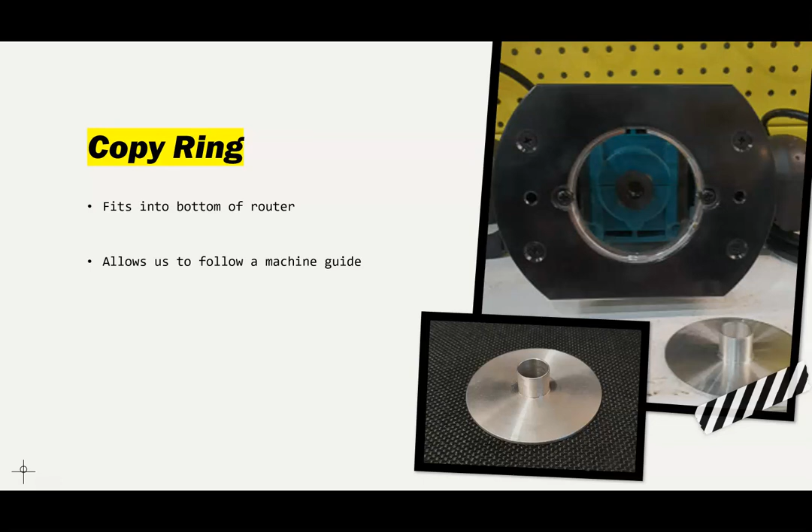So we can obviously purchase a range of different templates. You can get hinge templates, you can get letter templates, but with our laser cutter we can cut our own, and we can cut them very cheaply and efficiently out of cardboard, which can be recycled, so we're not wasting too much, and we can make them for quite large surfaces. In fact, you can actually create really large ones by adding smaller ones together if needs be.

We're going to create one that fills almost the entire size of our laser cutter, which is for us 800 by 500 millimeters. Before we do this, we need to do some maths about our copy ring and the cutter that we're using in order to achieve this milling capability.

We're going to have two assumptions, and this may change for you depending on which router and which cutter you're using, but most of us will be using a 16mm diameter copy ring, and a 1/2 inch cutter, which comes out at 12.5 millimeters. So those are the two assumptions we're going to use.

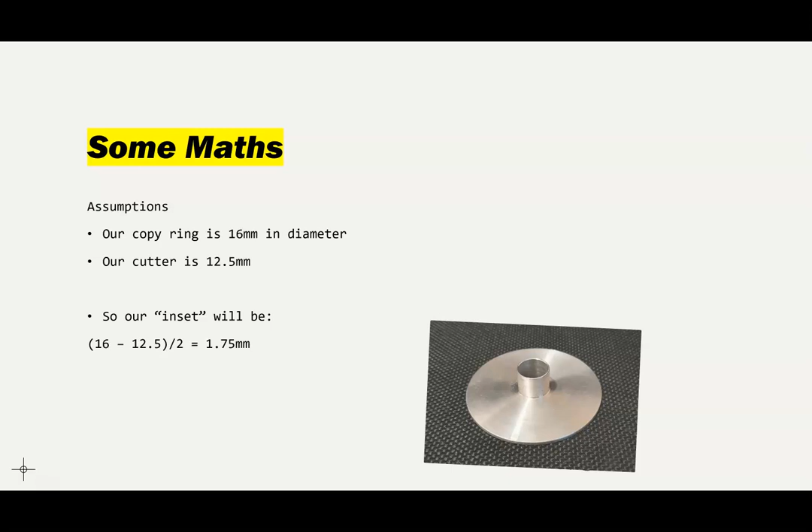Now, in order to do this, we need to do some maths. We have an inner offset and an outer offset, which we'll call our inset and our outset. The inner offset will be our inset, and that is going to be 16 minus 12.5 divided by 2, which is going to be an inset of 1.75 millimeters from the edge of our table.

And the other side of the slot that we're going to be cutting is going to be our outset, and that will be 16 minus that 1.75 millimeters. So that's 14.25 millimeters. So we're going to have to remember our inset and our outset, and you'll understand what this means fully as you follow the video through.

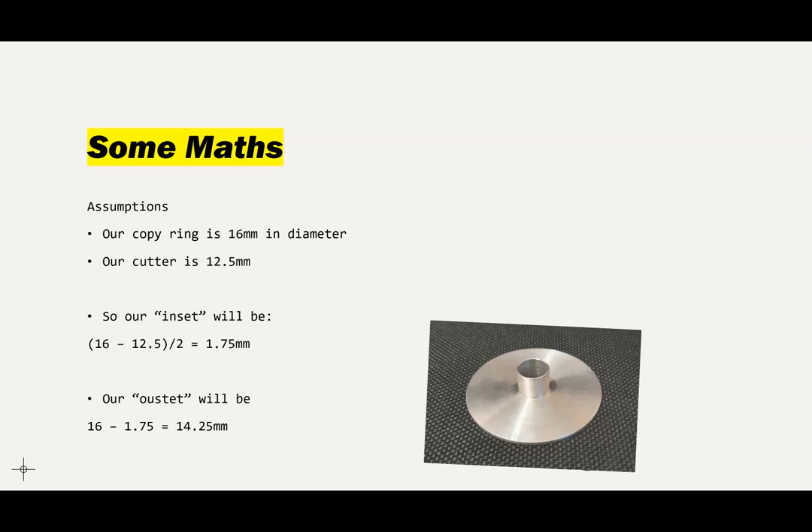So if you're not quite sure what I've done there, I've looked at the size of the cutter and the size of the copy ring, and I've done some maths in order to get that as close to my intended edge of my table as possible. So let's open up Fusion 360, and see how we go with creating this.

So here we are in Fusion 360, and I've created a little activity table. There's a Lego tray there. I'm going to put a plastic sort of container for the Lego to go in. And I've already created a machine guide so that I've tested this principle.

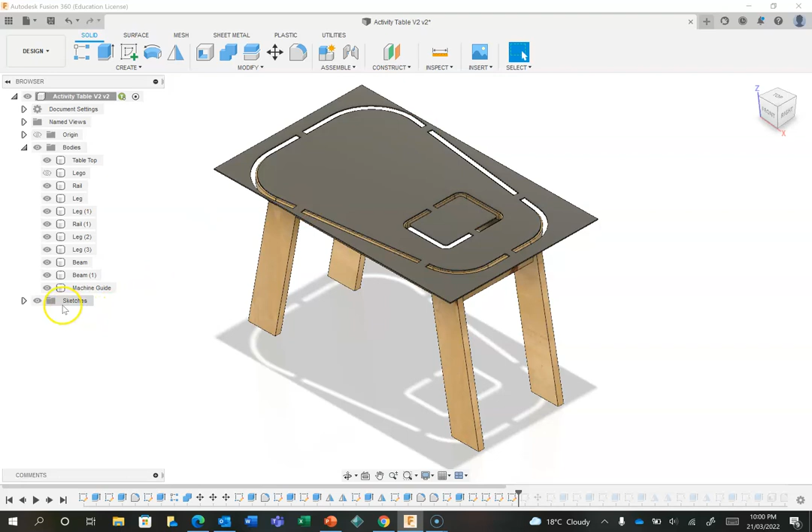There it is there. If I turn the Lego off, you'll see that it sits over there on a piece of cardboard. And this is what we create in order to create our copy guide, and you can see that the copy ring will sit in those grooves and cut around. I'm going to make some improvements on this one. For example, the tabs were a bit too big, so we're going to turn this machine guide off.

Before we do this, however, we're going to modify and change some parameters. We're going to create two user parameters. The first one is what we'll call our inset, the unit is millimeters, and it is going to be 1.75. And we're going to press OK on that.

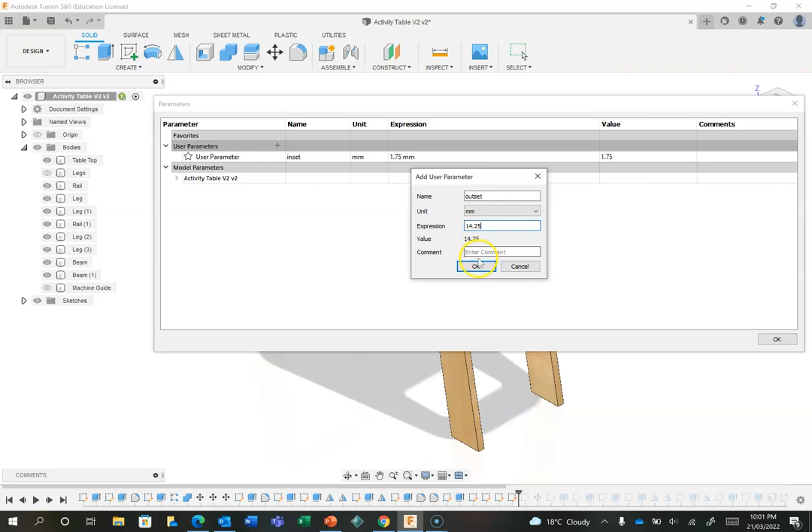I'm going to create another one, our outset, and our outset in millimeters was going to be 14.25. Now I've created these as variables because we can change these later, just in case we change the size of our copy ring or the cutter changes size, we can update those very easily without having to completely redraw this. So I'm going to press OK.

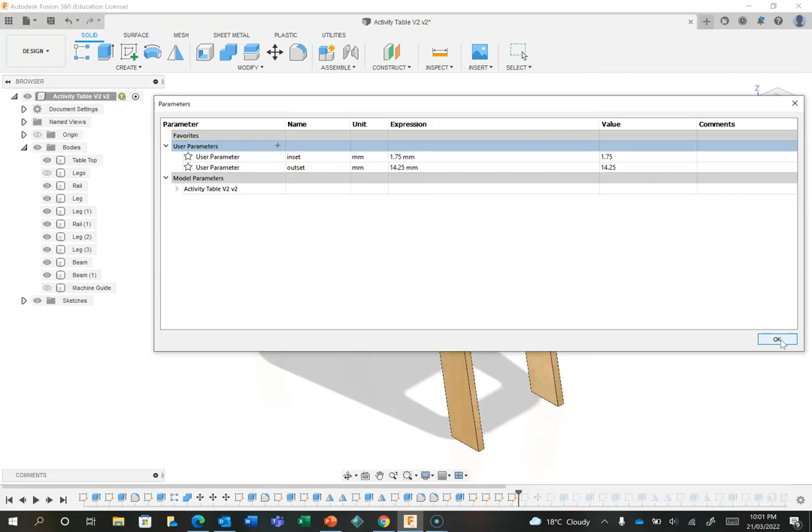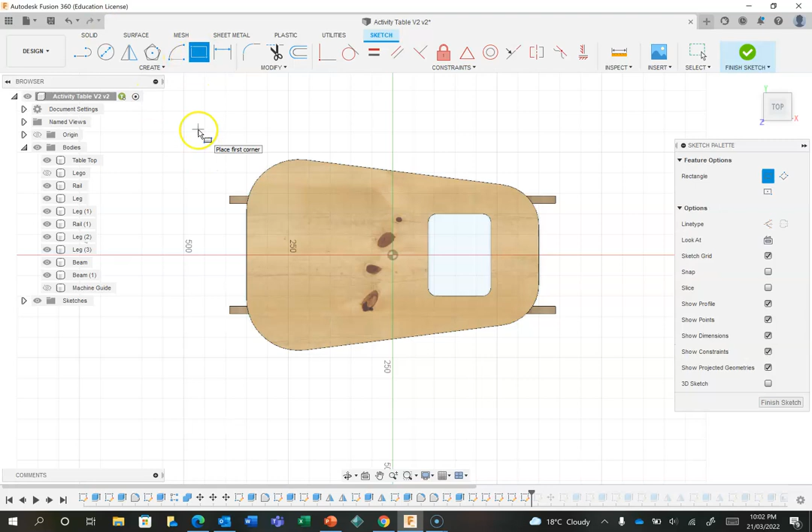Now that we've got those two, I'm going to create a sketch on the top of our table and move it around so that it's nice and in the middle. The first thing I'm going to draw is the outline of our object, which is the biggest size of our cardboard, the biggest size that our laser cutter can cut. So I'm going to draw this and put the dimensions on it. The dimensions are going to be 800 and 500.

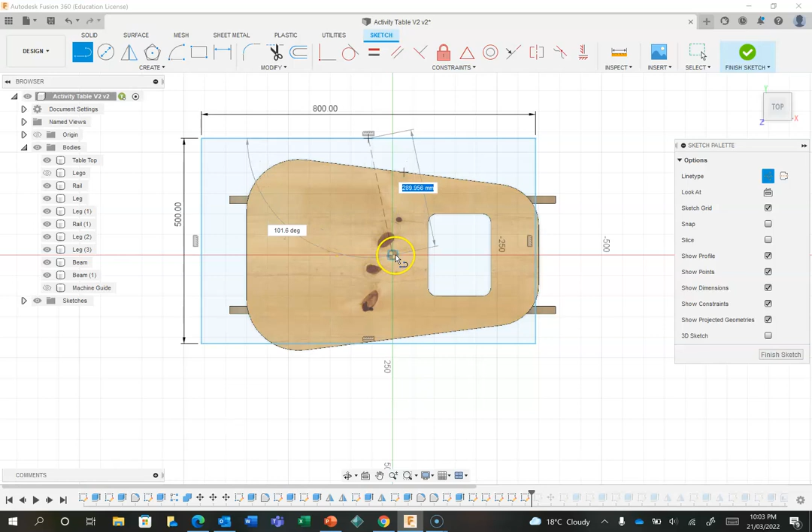And just to make it nice and easy for myself, what I'll do is I'll draw a line, and I'm going to draw a construction line. So I'm going to press on this icon over here. I'm going to go from the midpoint here. So as soon as I get that little triangle, that's where I'm going to go. So I'm going to click to accept that. I'm unclicking now, and I'm going to draw it down to this midpoint here. Actually, no, I'm going to draw it down to that midpoint down there, sorry.

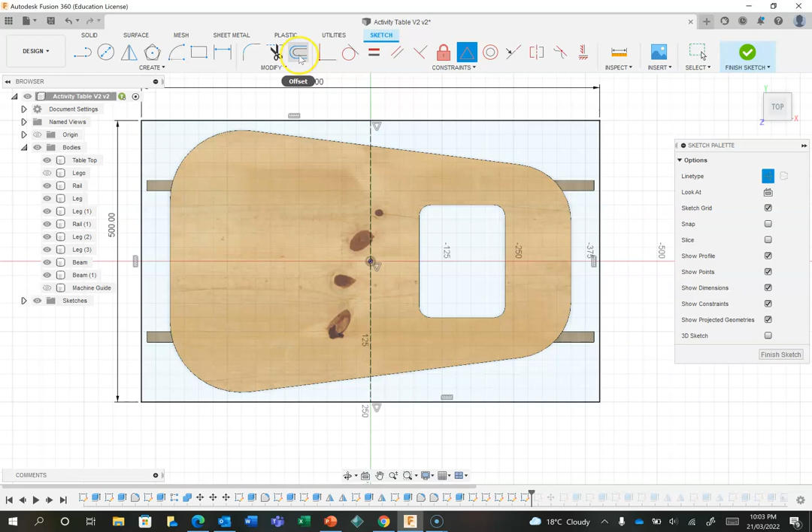So to click that, and then I'm going to use the midpoint tool, click on the midpoint tool, click on that line, and then click on the origin, and that's going to lock it nicely in place. So that's the first part of my sketch done. I'm now going to draw the inset using the offset tool. So the inset is going to be this one here, and the inset is going to be set to the inset. So I'm going to type in I, and that's my user parameter of inset, and I'm going to press on OK. So that is there, and I did that as a construction line.

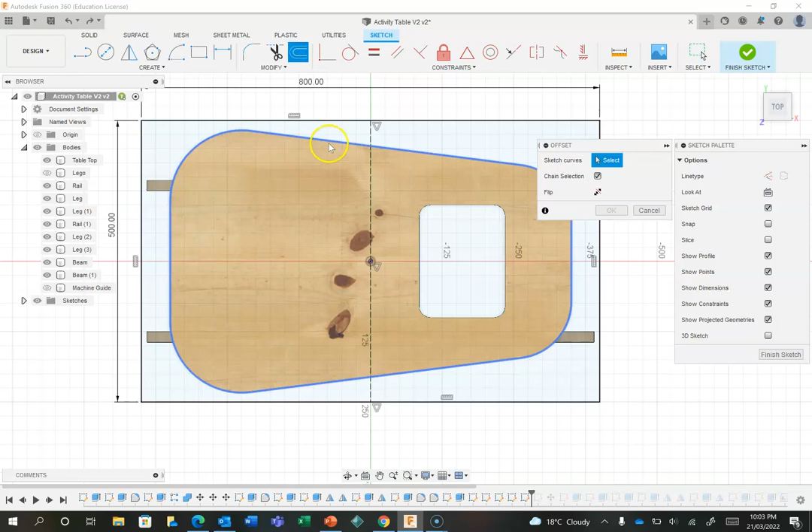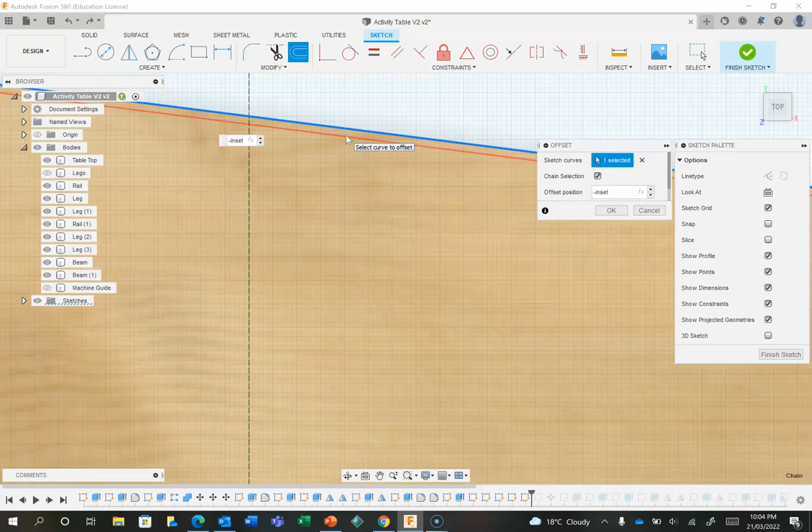So I'm going to press Ctrl Z to undo that, turn the construction line off, change it to offset again, and do inset. And one thing I'm going to check before I do anything else is to make sure it's actually inside the line. You can see it's not inside the line. So the inset is there, so I'm going to make it negative inset. Now it's inside the line. So the inset is inside of the outer edge of that thing, and if you imagine that the copy ring goes up against this edge here, because the cutter is slightly smaller than the copy ring, that's where the cut is going to actually be.

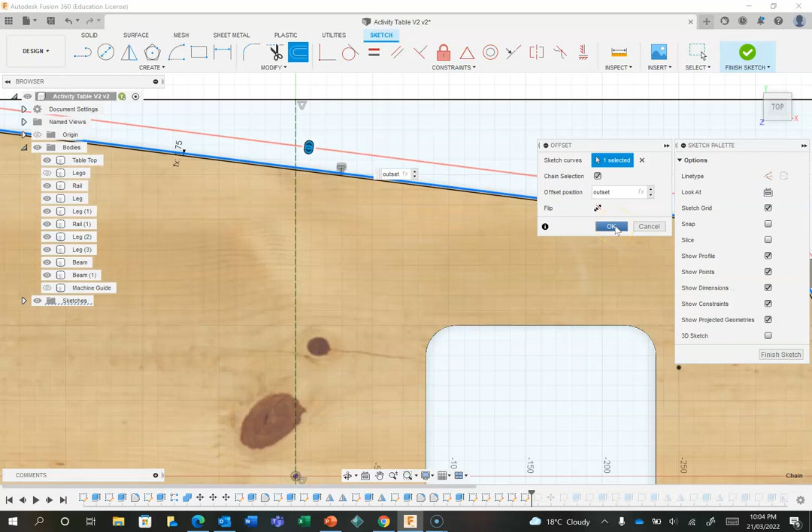So we're going to press on OK for that one, and now I'm going to draw another offset, and this will be the O one, which is the outset, and the outset is going to be out by so much, so that should be a distance between here and here of 16 millimeters. Let's just check that. So I'm going to press OK. I'm going to draw a temporary line from here to here, and I'm not going to click on it, but you can see there it's going to be 16 mils. So I'm going to press escape. That is what I need to draw.

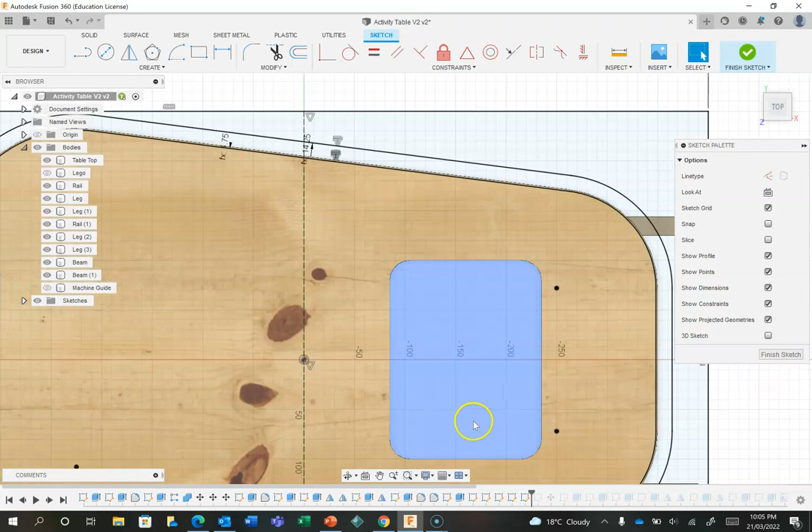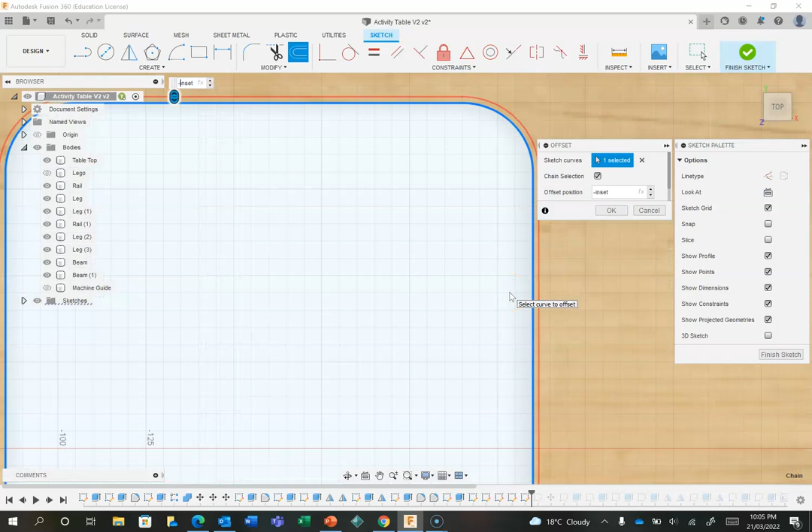I'm going to do the same thing for this inside bit here as well. So I'm going to draw an offset, and this is going to be the inset, so the offset position. This number here is going to be the I for inset. I'm going to zoom up to see if it's outside. See how it's outside the line. I want that to be inside, so I'm going to make that the negative inset and go OK. And once again, I'm going to click on this and click on the line, and I'm going to use the outset this time, and the outset will be fine. So those are going to be the lines I'm going to cut when I do my copy guide. So I'm going to press on OK.

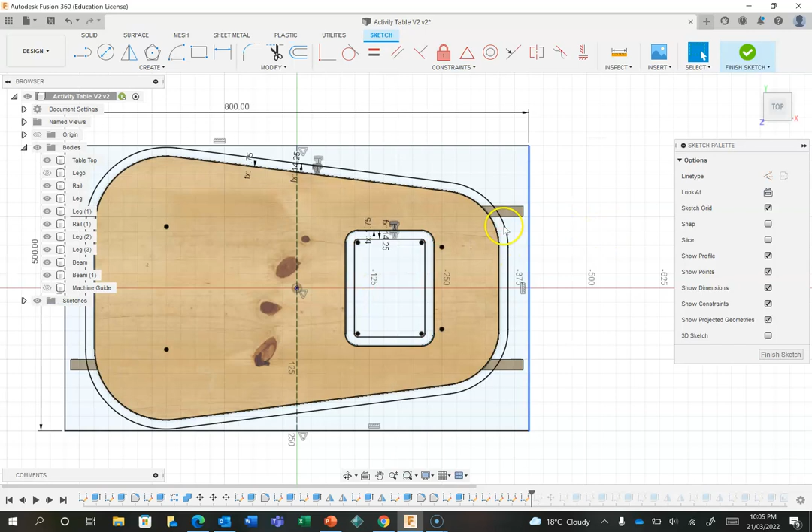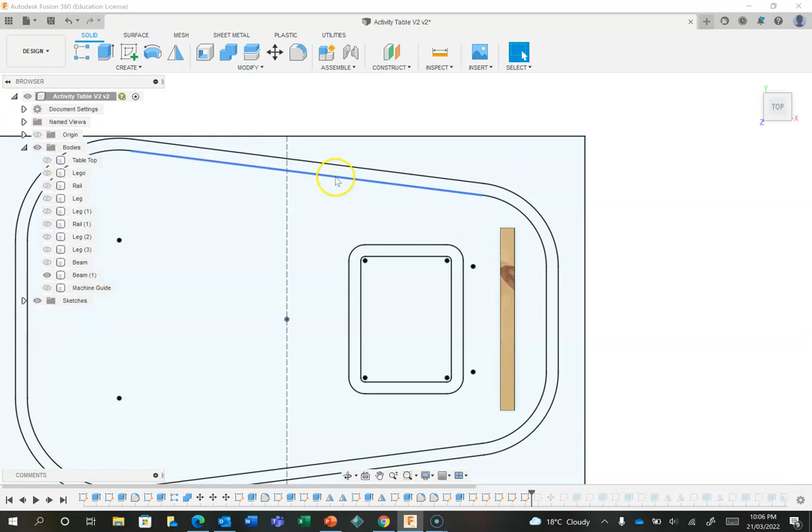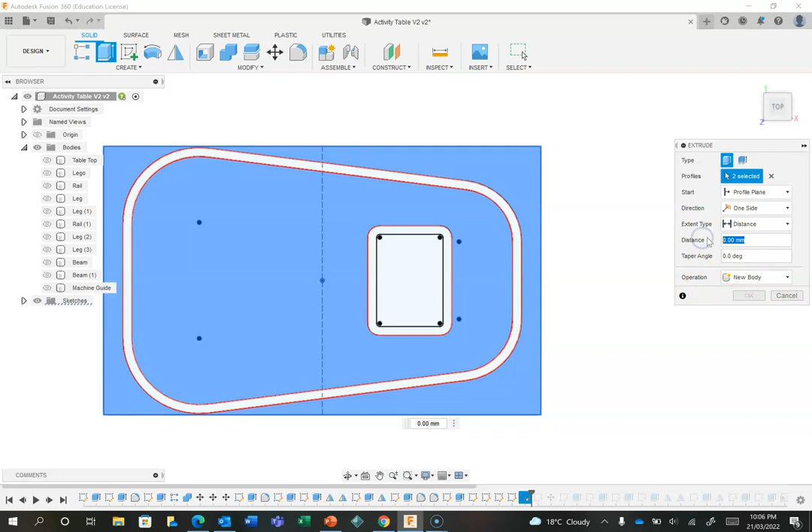Now if I just cut this out, it's going to create issues for me. But what I will do is I'm going to extrude this before it gets too complicated. So I'm going to finish my sketch. Now it's important to pay attention here because there is a little trick here. I'm also going to turn off the tabletop and all the other things. In this sketch, you'll notice that there's two lines here. It's important to note that there are two lines here, but we should be fine. What we're going to extrude is this one and this one. I'll turn that beam off there as well. So everything's turned off. It's going to be a new body, and I'm just going to make the distance 3 millimeters. So that is going to be what I'm going to do to cut.

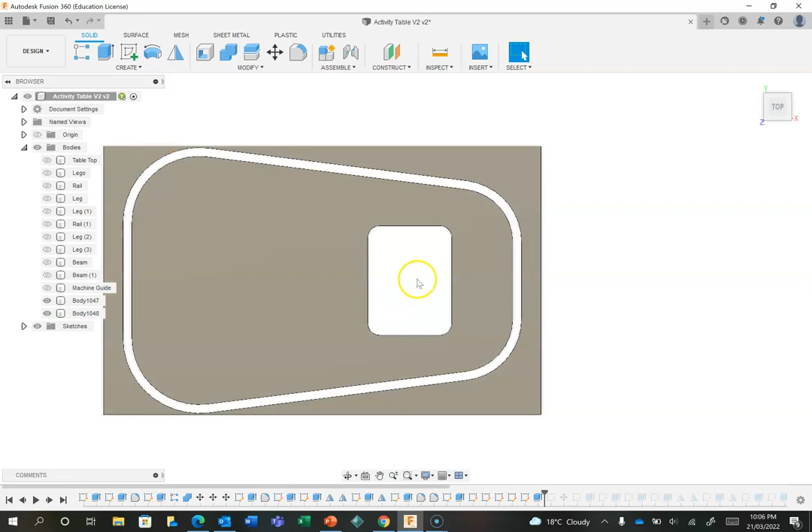But I need some tabs in order to hold this in place while it is cut. It's a good idea to have tabs going on straight edges. If you can't put them on straight edges, you need to put them on the outside curves. You don't want to put them on inside curves, but we've got lots of straight edges we can use. So I'm going to create a new sketch here, and I'm going to create it on this one here, and I'm going to put some tabs in place.

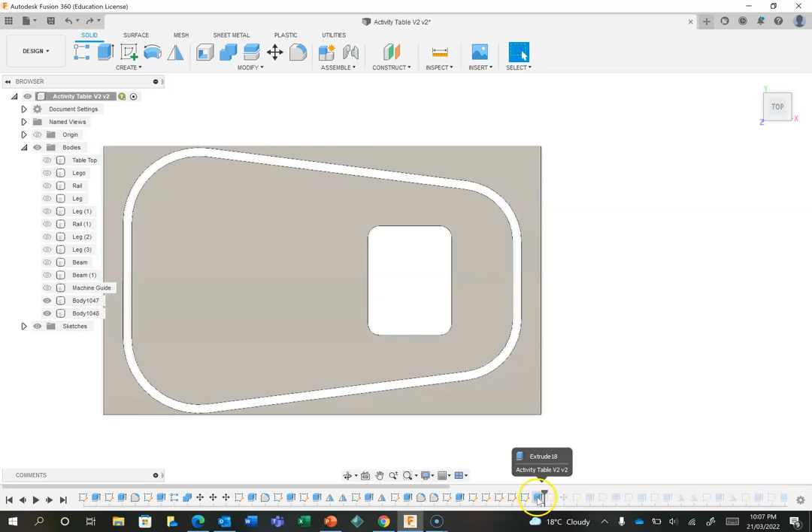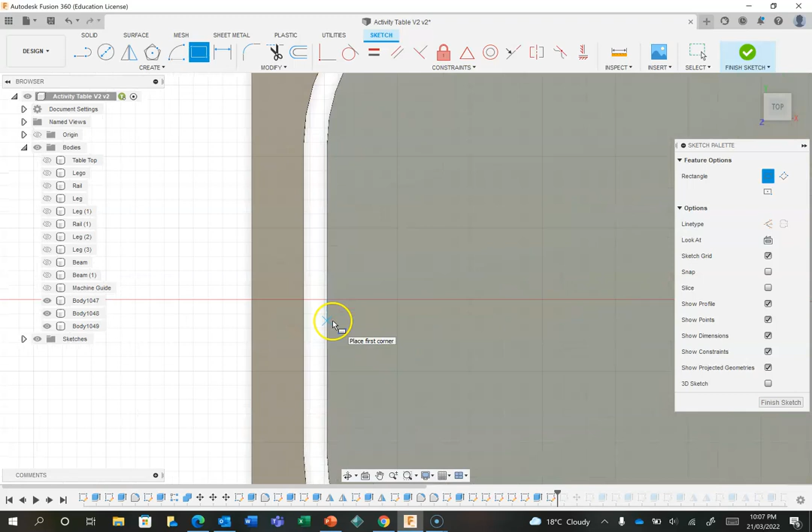Oops, I forgot to do something. Hit cancel, Control Z. Now when I created that last extrude, I'm going to double click here. I forgot to select this middle one here. Okay, that's better. So now I've got to create my tabs. So I'm going to create a sketch. I'll create it just on this surface here. And I'm going to basically zoom up with a rectangle on each one. And I'm going to create a rectangle here like so. I'm going to create a rectangle here.

And a rectangle here. Try not to lock anything. And before I put 2 rectangles everywhere, I'm going to put just 1 rectangle down here. And it doesn't matter if these aren't quite straight, because it'll still get to that point. And a rectangle here, and probably another one just over here. So 4 all the way around. Last time I did 6 all the way around. So 4 all the way around should be good. It makes a slightly better cut.

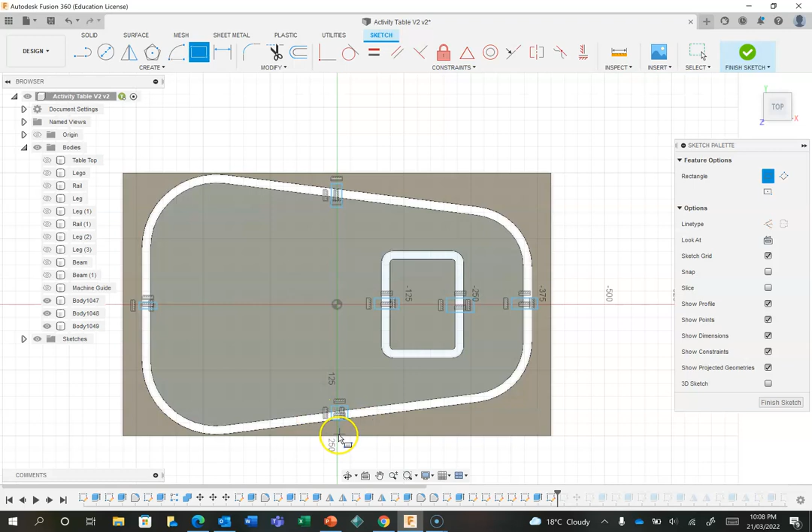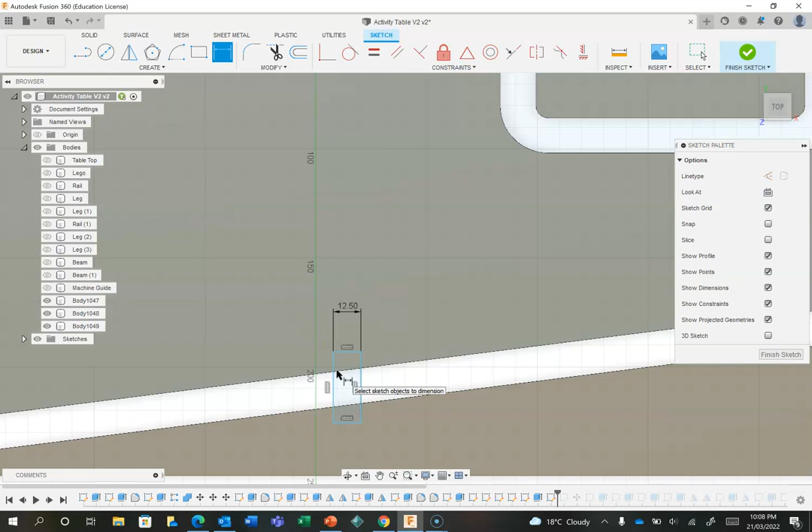And now I'm just going to press escape, and I'm going to start playing with dimensions of this one. I'm going to drag this one down here so it's a bit bigger. The main dimensions I'm worried about are the thickness dimensions. So the thickness dimension there, I'm going to make that 12.5 millimeters, which is quite thin, but it's just a nice small one. It's easier to deal with.

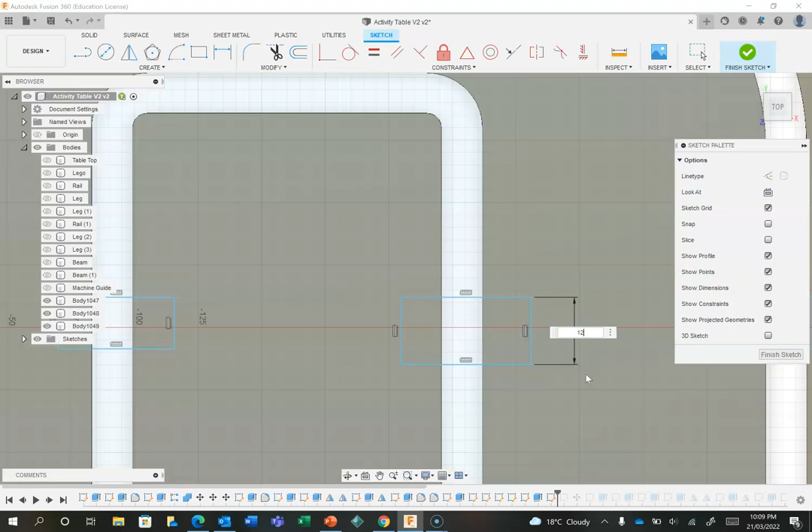Whoops, I probably should double click on this, delete everything, and then go 12.5. 12.5 is a nice size for it to cut through, and it means you've got less sanding to do. Last time I did 20 mil, and it was just a little bit too big there. 12.5 there, and 12.5 here.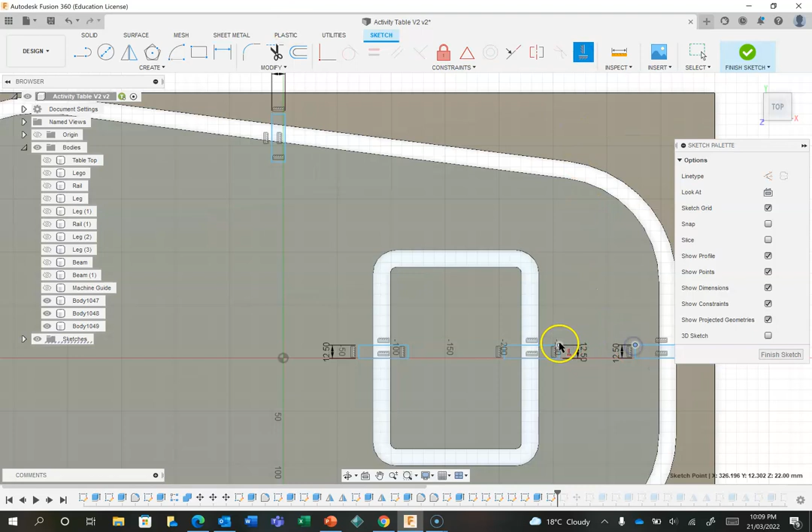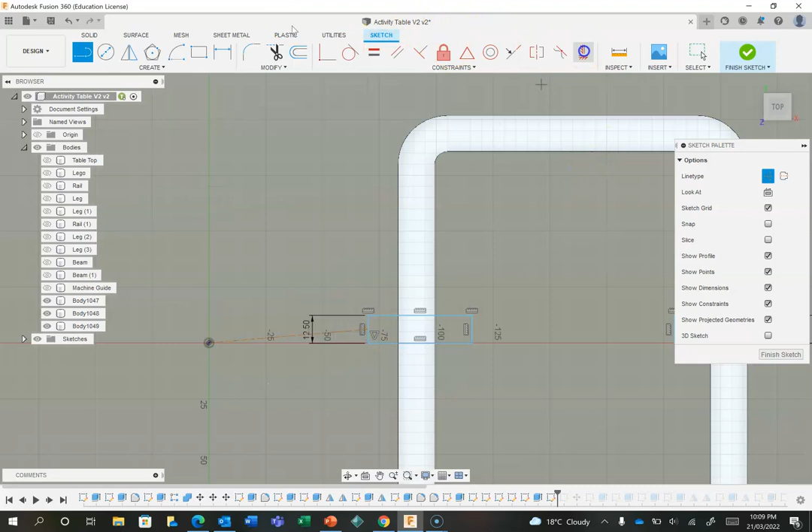I probably shouldn't be typing in all of these, because I can use the horizontal and vertical alignment tool to align this one to this one, align this one to this one, and then align this one here to this one here. And just to bring everything to the middle, I'm going to draw a line, make it a construction line, go from the origin to the midpoint of this one, and then use the horizontal vertical tool to lock this horizontal, and that brings those nicely in a line.

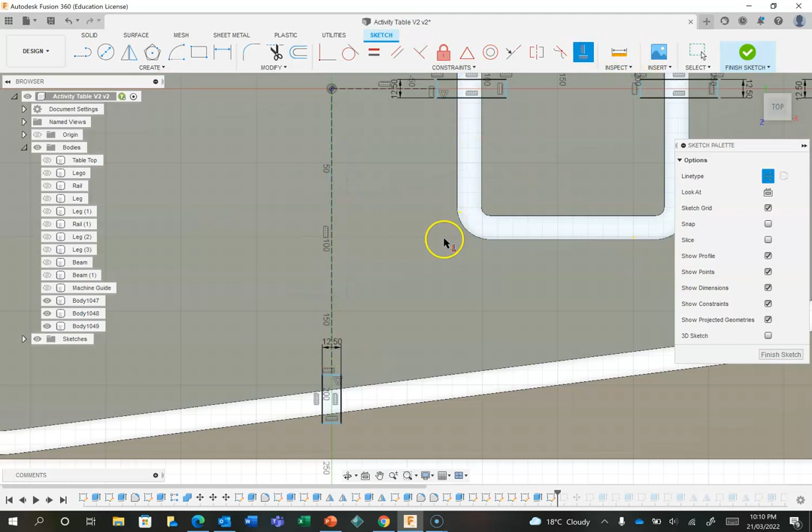And I could probably do a similar thing to this one, draw a line from this one here down to the midpoint of that one there, and once again use the horizontal vertical tool to lock that one to there. And then I can use the horizontal vertical tool from this one all the way up to this one. Just bring those nicely in place.

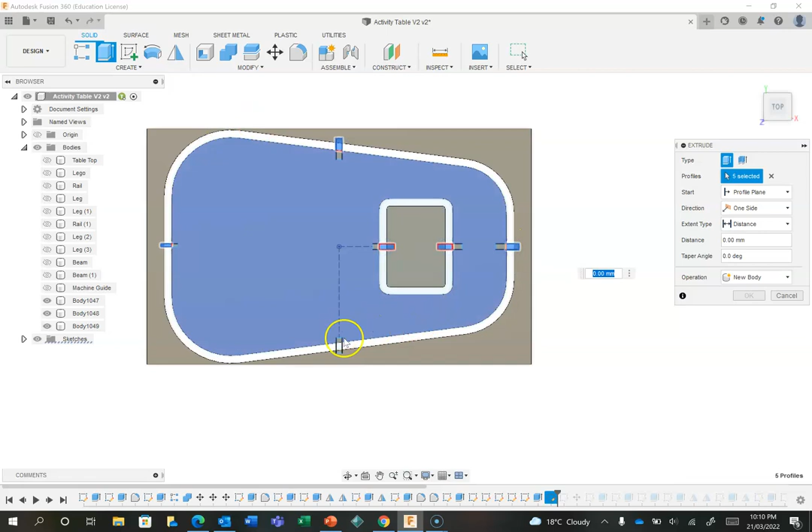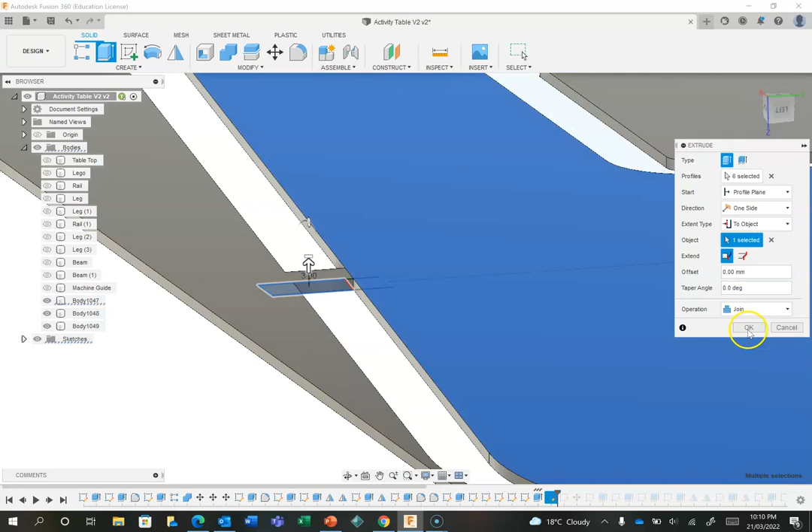I'm going to go finish sketch, and I'm going to extrude that one and that one. I missed something here. And that one and that one and that one and this one. And I'm going to extrude them to a surface. Let's just look at them from the top. This bit gets a bit confusing. I'm going to extrude the distance to object and extrude it to the other side, so that they're going to come through there. And I'm going to make them into a join like so, and press OK. Now if I look at these from the home view, I've now got the tabs there.

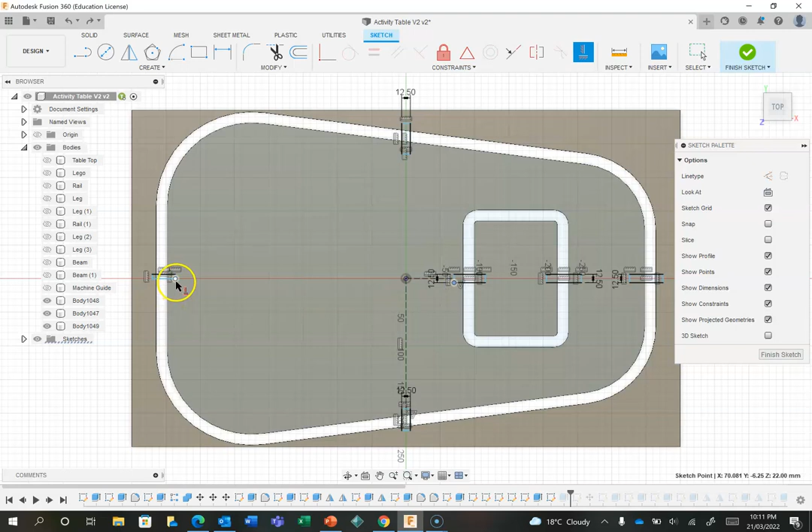This tab is a bit thin, so I'm going to go back into this sketch, modify this, and realize how thin that is, because these are all 12.5s. The easy way to fix this is to go horizontal vertical and lock this one. Oops, undo, Control Z. Horizontal vertical, lock this bottom line here to this bottom line here like so. That's going to fix that up, finish the sketch, and now that's nice and even with everything else.

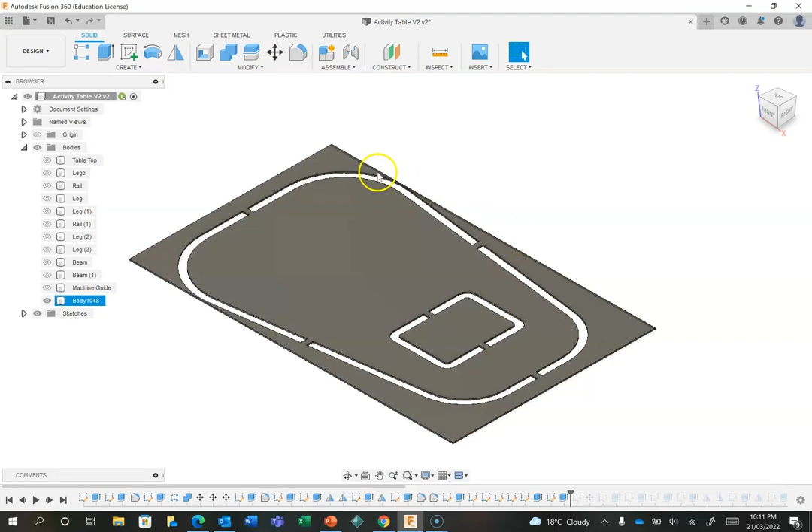Now that might be strong enough. It should be strong enough for me to do this. If not, you could probably put a couple of extra tabs here and there, but I'm thinking that is a good size. So that is ready for me to send to the laser cutter. Let's just see what it looks like on the tabletop. See that it matches up perfectly with everything. There's a little bit of a lip in there, and that's what you'd expect, because the cutting tool is slightly narrower than the guide tool.

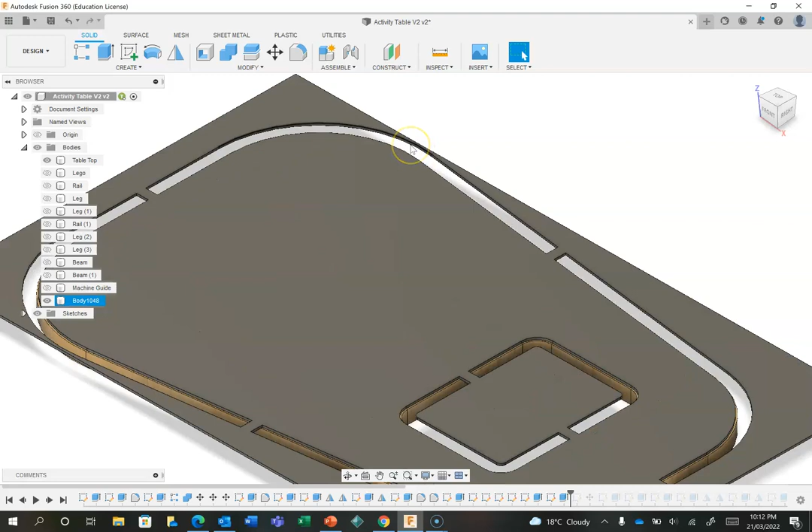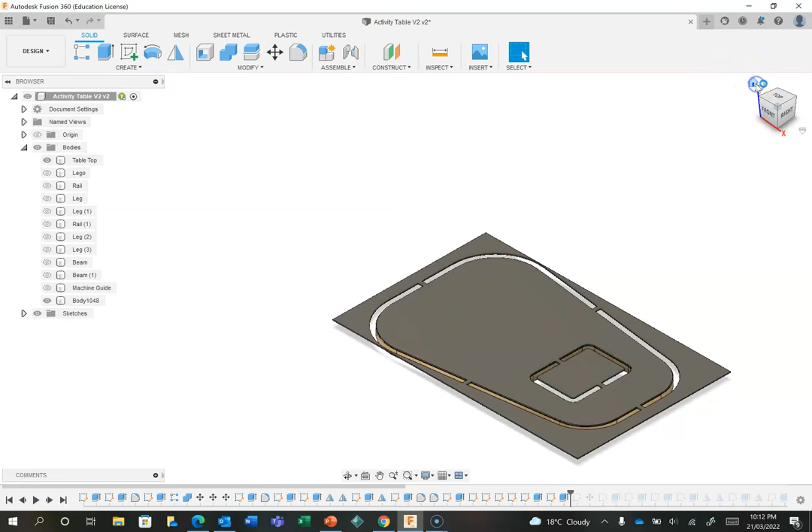It's probably going to be a little bit too thin there, so you might actually want to put extra in here. So if it's too thin at any point, you might want to put an extra marker here or a tab across here. Once you've got that, the final thing to do is to get it to a DXF file so you can take that into Adobe Illustrator. So if I create a sketch on this surface now, press P to project, click on the middle of the surface and press OK, that sketch is now finished.

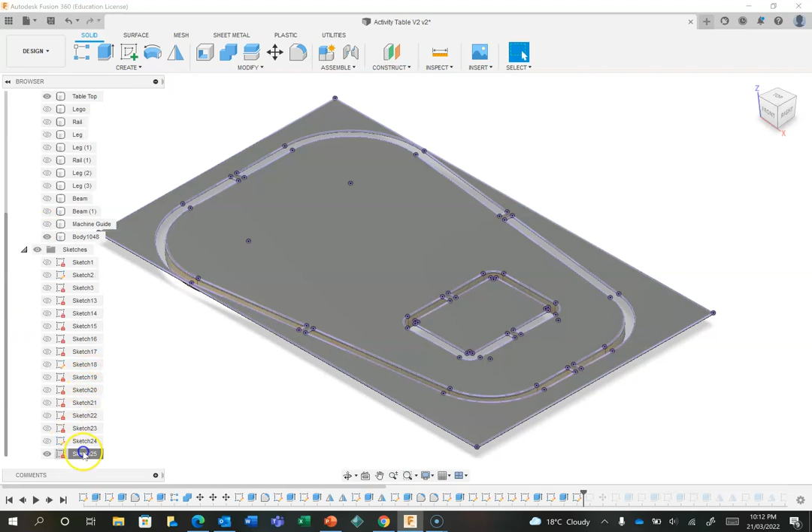This sketch here, I'm going to double click on this and call it the machine guide sketch. The machine guide sketch is what I'm actually looking for, so I can right click on the machine guide sketch and save that as a DXF. I'm going to save it to the desktop, and I'm going to call it machine guide for activity table, so I know what I'm talking about. You can save it to downloads, your documents, wherever you want. I'm going to hit save.

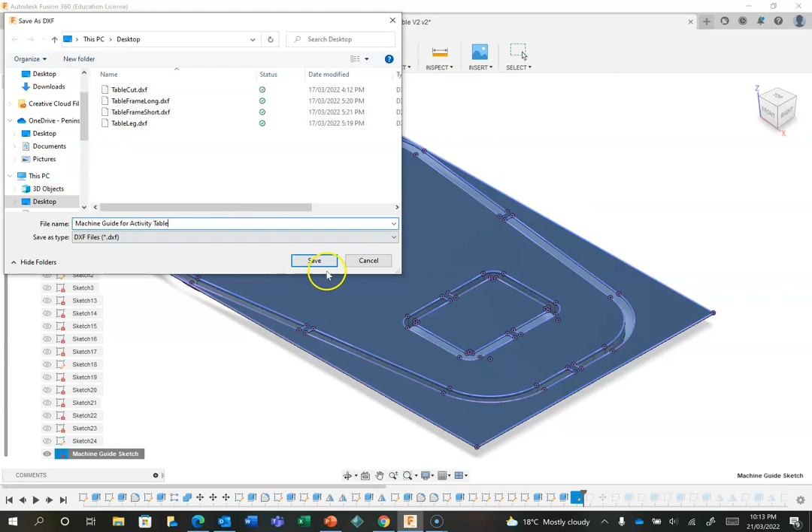I can then take that into Illustrator as per the normal laser cutting routine. I can put text on it to indicate certain things, for example notes on how things should go. And that is how you create the copy guide or the machine guide for my activity tabletop.